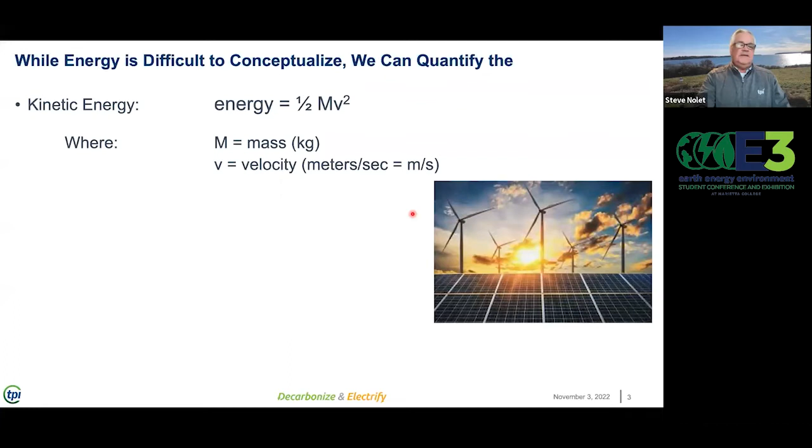We talk about kinetic energy, and kinetic energy is important to us in the wind industry because that is what we're converting to different forms of power or energy. We all know the equation for kinetic energy, right? 1/2 mv squared, where m is the mass of an object in motion, v is its velocity, and the resulting units, kilogram meters squared per second squared, are joules, right?

We all know this. We also know that potential energy, in the same units, is the mass times its gravitational attraction and its distance of potential travel, mgh. Other units that we might talk about besides joules: calories, British thermal units, ergs, foot-pounds, newton meters, and even that thing we see on our power energy bill monthly, the watt hour, is a description of the energy, the quantity of energy that is consumed or used or transferred.

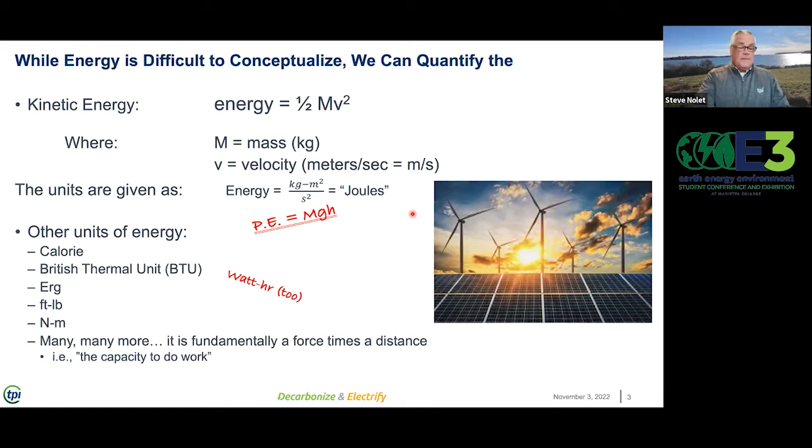There are many other ways to describe energy, but at the end of the day, it's the capacity to do work, and we use and harness energy to do work. Remember, energy and power are closely related, but not the same thing. Energy is the ability to cause change, but power is the rate at which energy is transferred.

Power is the change in energy of a system divided by the time that change occurs, and we call a joule per second a watt. Take 1,000 watts and we call it a kilowatt. Multiplying the power over a period of time gives the energy being used. There are 3.6 million joules in a kilowatt hour of energy.

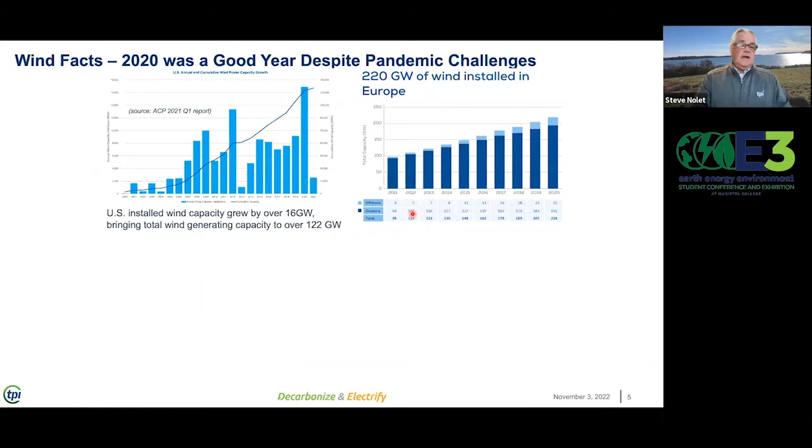Let's shift gears and talk more about wind now. It turns out 2020, despite the pandemic, was a pretty good year for wind energy, particularly in the US, where 16 gigawatts of increased capacity was added to our electrical grid. Similar performance occurred in Europe, where installed capacity across Europe reached 220 gigawatts.

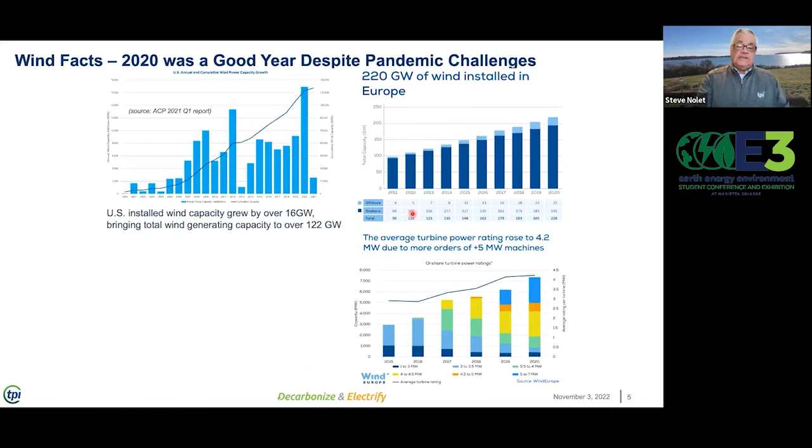Much of this is due to changing and growing technology, where the average power rating of machines tendered in 2020 rose to 4.2 megawatts per turbine, as turbine technologies now exceed 5 megawatts per turbine. These are very large machines.

Also at the end of 2020, during 2021, the Biden administration announced an ambitious but achievable goal in North America of installing 30 gigawatts of offshore wind by 2030.

The Europeans have been working on and installing large capacity offshore wind in the North Sea for about a decade now, and we have a long way to catch up in North America, but that growth is already beginning. Dominion Energy commissioned a 12 megawatt project in 2021, and New York State has committed large resources to building both infrastructure and capacity, with leases issued in the Long Island Sound. Offshore wind is coming to North America very quickly.

The nation's energy capacity, the United States energy electrical generation capacity, grew a lot, as I said, by 16 gigawatts in 2020. Now in the fall of 2022, we have an installed capacity of 140 gigawatts.

But there are technical challenges that remain. As you can see, a large sector of the country, particularly the Southeast, has very low, next to zero installed capacity. And that's not a political statement—that's a fact of reality of the lack of resource at ground level to generate power from the wind.

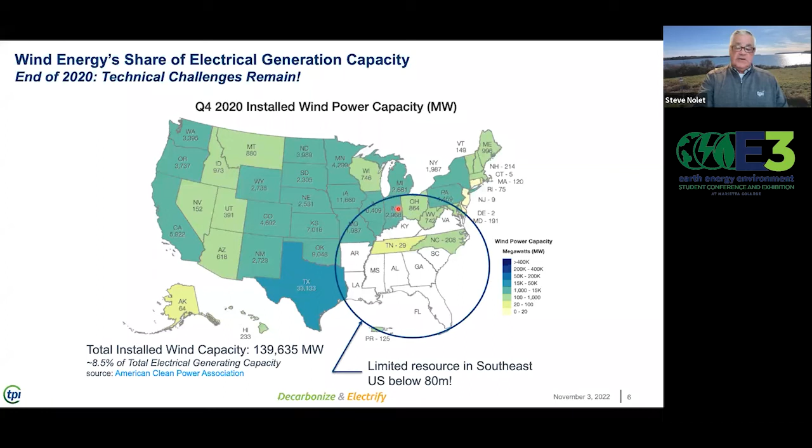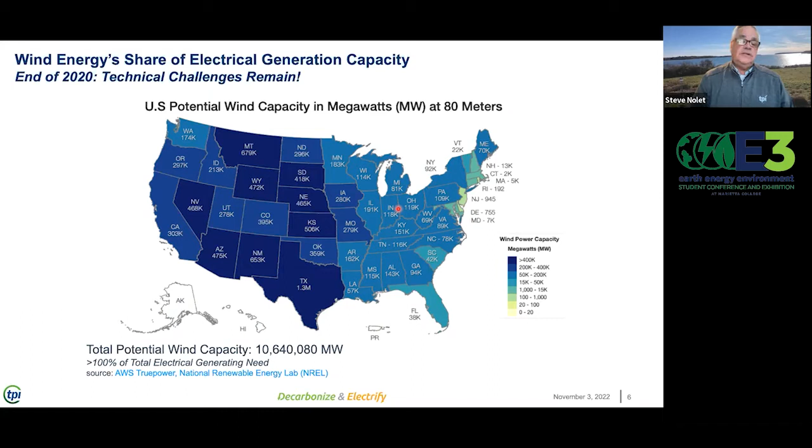With taller towers and larger capacity factors, it turns out that above 80 meters, we can build out capacity in the Southeast and across the country with a potential capacity of up to 10 terawatts of electrical energy generating capacity. The challenge is a technical one, and we can meet that challenge with new ideas and approaches to building our wind turbines and generators, particularly as the electrification of our economy continues to build out in transportation and other sectors.

Fundamentally, there are two types of wind turbines that we build and deploy. The most common, which you'd be familiar with, is the horizontal axis wind turbine. The name is self-evident—the axis of rotation is horizontal to the ground. We call these HAWTs, horizontal axis wind turbines, and they come in all kinds of flavors, but you're certainly most familiar with the three-bladed upwind HAWT that builds out our utility scale generating capability.

But there have been other technologies developed and demonstrated, including ducted turbines, to increase the swept area, the effective swept area of the wind turbine, and capture more energy.

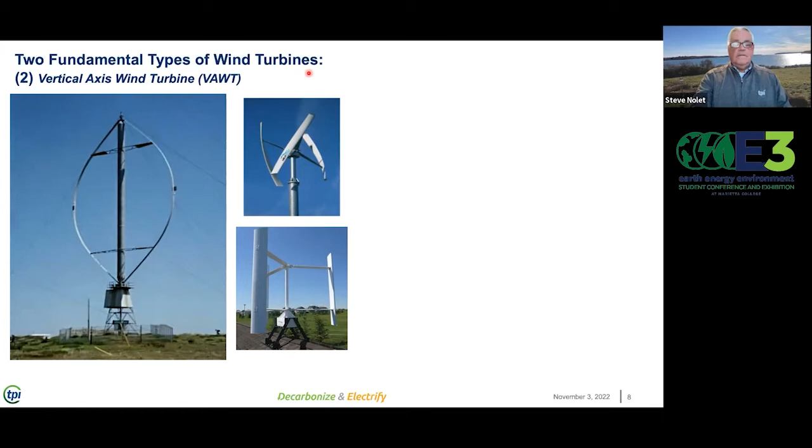Less familiar, but you probably recognize, are the vertical axis wind turbines, such as this Darrieus generator that was built in the 1970s, to more architecturally aesthetic Darrieus vertical axis wind turbine generators. Offshore systems that have been conceptualized, designed, and still remain on the drawing board are possible as well.

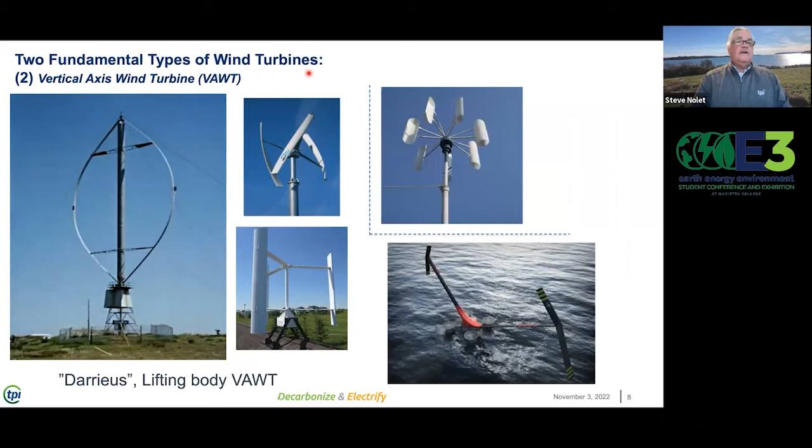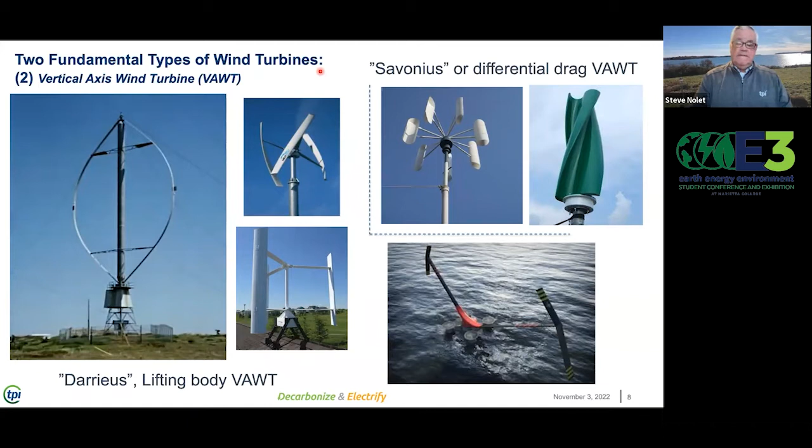There are other types of vertical axis generators called Savonius machines that use drag to drive or create torque that will turn a generator and create electrical power. But the jury's in: the horizontal axis wind turbine is the de facto winner of the utility scale wind turbine race.

A HAWT needs a way to keep the rotor facing into the wind in order to create lift on the blades, and that lift is then turned into torque, which turns a drive shaft, which turns a low-speed shaft that then rotates a gearbox to turn a high-speed shaft and run a generator. On large turbines, a yaw drive motor is used, so we have a control system that is driving the nacelle and pointing it ever into the face of the wind.

With the VAWTs, they're much simpler. The VAWTs operate without yaw bearings and are always pointed into the wind regardless of the wind direction.

Both the HAWTs and the VAWTs create torque to turn a generator through airflow over wing-shaped blades, specifically the Darrieus VAWTs, not the Savonius, which are drag machines. Horizontal axis blades generate lift throughout their full 360 degrees of rotation. With vertical axis machines, they lose lift as they turn away from the wind and actually create drag on the system. That drag is designed to be quite low, but they simply do not generate power through interaction with the wind through the full 360 degrees of rotation.

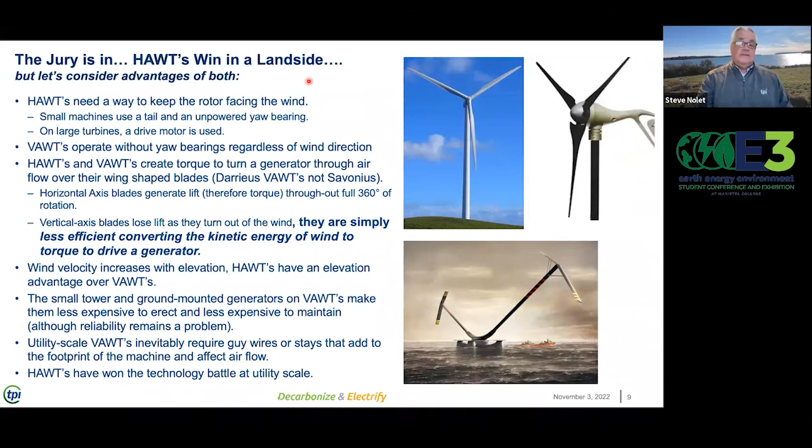Utility scale VAWTs, when we say utility scale we're talking very large systems, inevitably require some form of guy wire at the top of the tower to stabilize it and overcome some of that moment. It adds to the footprint of the machine and affects the airflow. It turns out that HAWTs have really won the technology battle at the utility scale, and we'll see why as we talk about cost of energy in just a bit.

We look under the hood of a horizontal axis wind turbine. They're really sophisticated and glorious machines, sort of a mechanical engineer's dream, if you want to know the truth.

Of course, we understand the blades, and I'll talk more about blades in a bit, but those blades are connected to a hub, and the hub is connected to a low-speed input shaft that is generally part of the system, where a gearbox then increases the speed of the rotation to a high-speed shaft through gearing.

Through that high-speed shaft, we turn a doubly fed induction generator that creates the electrical power that is fed to the grid, with unique and wonderful power electronics that keep that signal synchronous with our electrical grid to feed that power seamlessly to users and consumers.

There's always a meteorological tower on the turbine to provide control inputs, direction and wind speed, which will then send commands to pitch motors that turn a pitch bearing to rotate the blades, either increasing lift through increasing angle of attack, or feathering the blades away from the wind when it's overpowering the turbine, much like a sailor would let out the sheet or pull in the sheet to change his angle of attack on the sail. We do the same thing with the wind turbine as well.

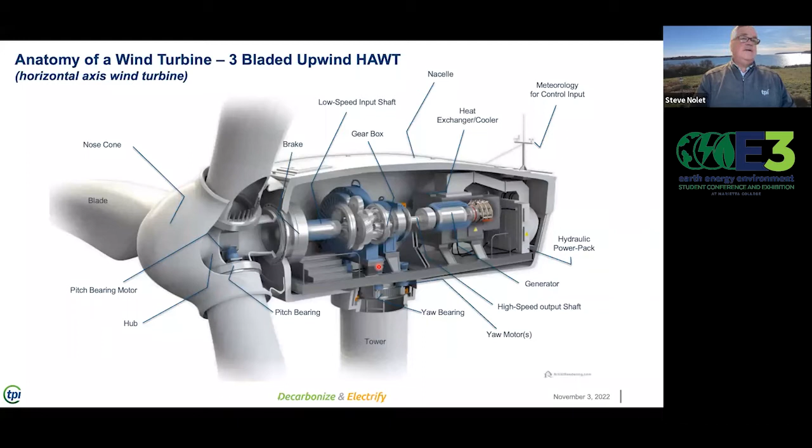There are larger machines today that are using direct drive systems, where the shaft from the rotor is directly fed to the generator. This requires very large rare earth magnets on very large running generators to create the velocity needed to create synchronous electrical power for the grid.

All right, let's talk a little bit about the energy that is in the wind. If we're going to create electrical power, we have to convert that kinetic energy in the wind to torque, and from torque we can turn a shaft and we can turn a generator.

What is the power in the wind? We talked about kinetic energy, and the reason I talked about kinetic energy is because that is what we're harvesting, that kinetic energy in the wind. We can describe that as 1/2 rho pi r squared v cubed.

That doesn't quite look like 1/2 mv squared, does it? Well, that's because we're taking into consideration the density of the air, the constant pi multiplied by r, which is effectively the length of the blade. So pi r squared is the swept area, with the density of the air as rho, and the velocity of the wind that passes across the rotor.

Pi r squared rho v is the mass that passes across the rotor and interacts with the blades. So this reduces to our kinetic energy equation, where the swept area is pi r squared, of course.

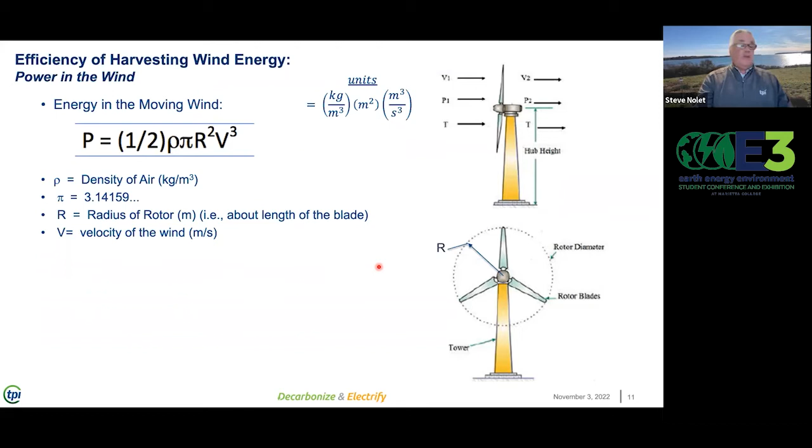If we look at the units, we have kilograms per cubic meter, the mass of the air, meters squared, the area, and meters cubed per second cubed as the wind velocity term, giving us the mass of air passing through per second. That gives us our units of watts, power generated. So that's the power in the wind, 1/2 rho pi r squared v cubed, joules per second.

So our kinetic energy, multiplied or integrated with time, is our energy, and our power is in joules per second, or watts.

So if we look at this equation, the power scales linearly with the air density. In the summer, where the air is a little less dense and warmer, we produce less power. In the winter, when the air is denser, we can produce a bit more power. This is only a couple of percentage points difference in air density, but that's not where we create our power.

The power goes up with the square of the blade length. So if we double the length of the blade, we have four times more power output, given all else being the same. But much more important, of course, is the power in the wind.

It's increasing with the cube of the velocity of the wind. So at very low wind speed, not much power, but we go up with the cube — we increase our power output with the cube of the wind velocity. That's rather compelling and will drive our choices for siting a wind turbine.

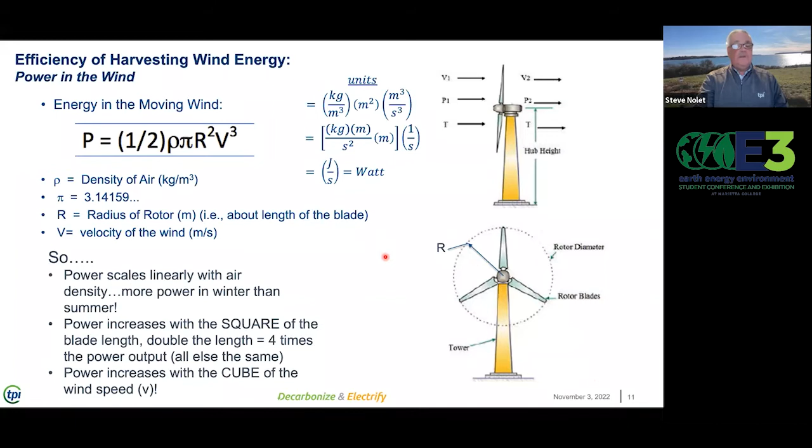What about efficiency? How do we describe the efficiency of a wind turbine? Do we convert all of the energy, all of that kinetic energy in the wind, to electric power? The answer, of course, is no.

In order to harvest 100% of the kinetic energy of the wind, we'd have to convert all of the movement of the air molecules to torque to drive the shaft and create electric power. That means that after the air passes through the turbine rotor, it comes to a stop — in other words, the velocity is equal to 0 meters per second.

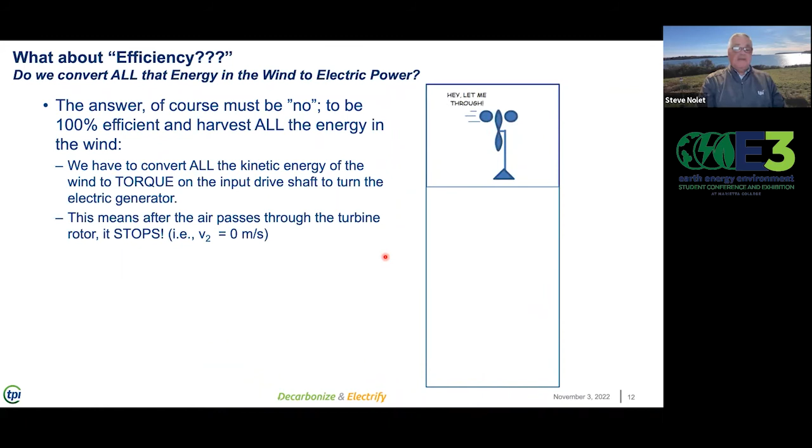Now picture our cartoon wind turbine. We've got air molecules wanting to rush through. That can't possibly happen — we can't stop the wind behind it because we'll create a traffic jam. And if the air doesn't move behind the turbine, that means it comes to a stop and no more air can flow through our turbine.

So it's simply not possible to convert all of the kinetic energy to electrical power. But what's that limit? We call that limit the maximum amount conceptually possible to convert — the Betz limit, from Albert Betz in 1919. So we've known about this for a long time.

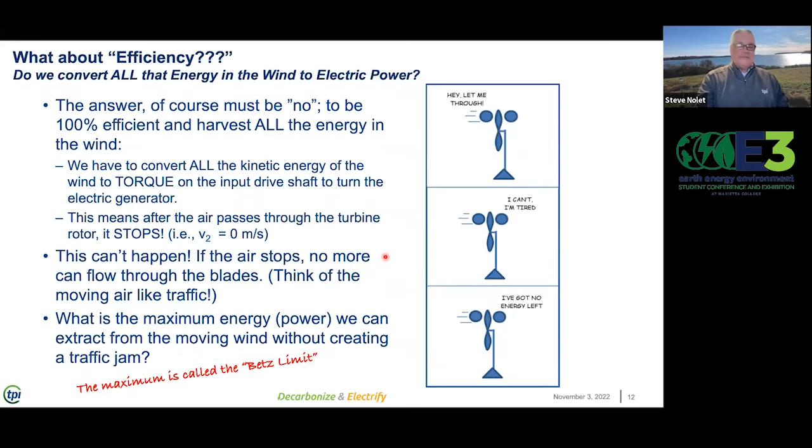We solved the problem in a longer course — I could teach and derive the Betz limit, it's quite straightforward. But what is that Betz limit? We'll talk about it in just a minute. Before we do that, let's talk a little bit about energy production terms when it comes to wind energy.

The power in the wind, as we said, is 1/2 rho pi r squared v cubed. And we talk about something we call the rotor power coefficient. The rotor power coefficient describes how effectively we interact with the wind and harvest that percentage of available power.

We'll look at an example of that right now. The CP is defined as the fraction of power in the wind that's converted to mechanical energy. In other words, P equals CP times 1/2 rho pi r squared v cubed — simply a coefficient describing what percentage of the power in the wind we convert to electrical energy.

The Betz limit says that the maximum coefficient of power that is theoretically possible is 59.3%. I get calls almost on a monthly basis from people across the globe that have a better wind machine, and the first thing we'll look at to determine whether or not they're selling me a perpetual energy machine is their CP.

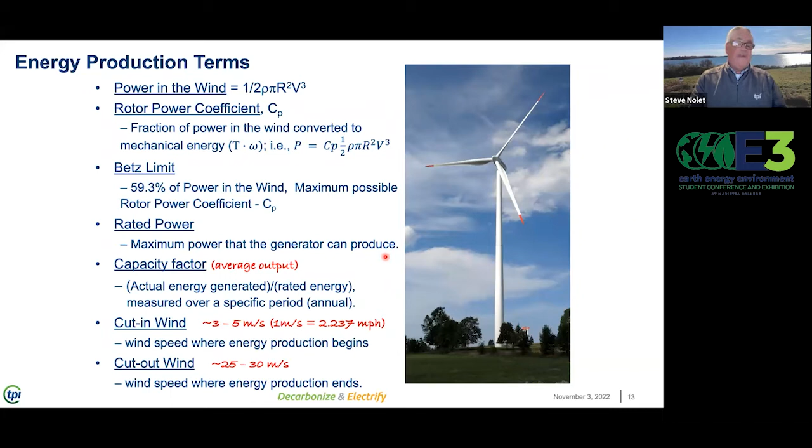You might ask, Steve, why don't we keep the generator running? We'll talk about that in a moment, but you can imagine at some point a turbine can become overpowered, and when it becomes overpowered and the blades deflect far enough and strike the tower, that's a bad day in the life of a wind turbine.

Let's talk a little bit about turbine efficiency and the power coefficient CP. We define the CP as the energy produced by the wind turbine divided by the total energy available in the wind at any given wind speed. We can write that as output equals CP times one half rho times the swept area of the blade times V cubed.

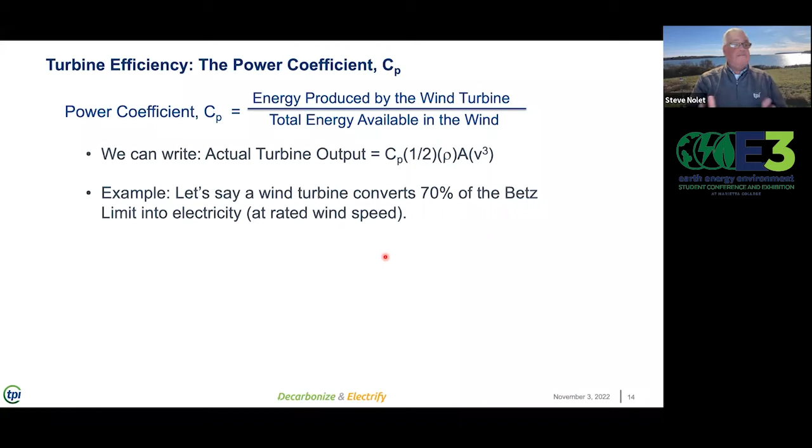If we say, for example, that a wind turbine converts 70% of the Betz limit into electricity at a rated wind speed, then the CP is 70% of 0.593, which equals about 0.4—so the wind turbine converts about 41% of available wind energy into electricity. That's pretty good value. Typical power CPs of modern turbines today run in about the 35 to 45% range—35% to 45% of that kinetic energy directly converted to electrical power supplied to the grid.

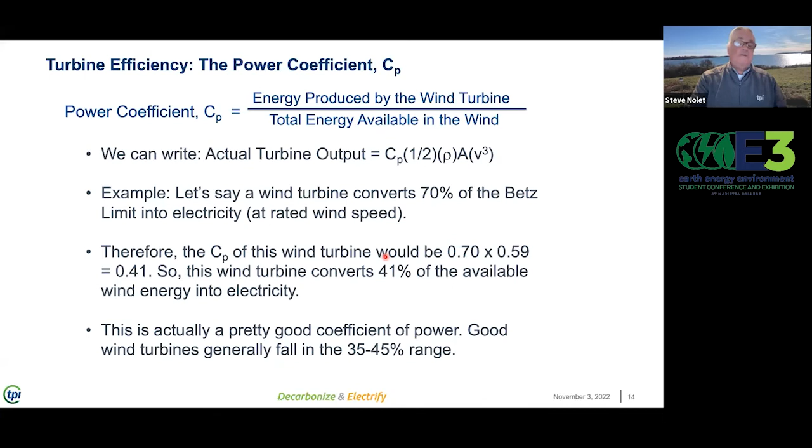Let's look at this in more detail. Let's think about a 48.7 meter wind turbine blade. When I wrote this slide up a couple of years back, that was a nominal size of a wind turbine, a 2.5 megawatt or maybe a 1.7 megawatt machine with a rotor CP of 39%.

If we look at the power output in the wind, or the power output of a turbine, on the y-axis versus the wind speed in meters per second, the blue line represents the total power in the wind—that's our power-in-the-wind equation plotted in kilowatts as a function of wind speed. The Betz limit, which defines the maximum available for us to turn into electrical energy, is the red line, and then multiplied by our rotor CP of 39% is the green line.

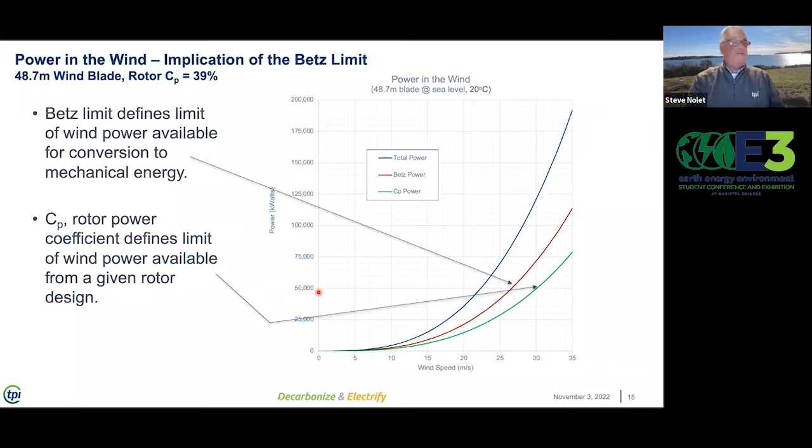That tells us that at 30 meters per second, our turbine is capable of producing 50 megawatts of power. That's a lot of power, and yet I'm telling you that this turbine is rated at about 1.7 to 2.5 megawatts. Why is that? Well, we'll look at that in just a minute.

Let's look at it a little bit more closely.

Let's look at the capacity factor. Capacity factor is the fraction of time, usually over an annual period, that a turbine is operating at its rated peak power. The capacity factor is the average output divided by its peak output.

Capacity factors are typically 30 to 50%. In fact, modern wind turbines today that we're putting in the field all have capacity factors on the order of 50%.

The capacity factor is a characteristic of both the turbine, what we rate the power at, and the CP, the power coefficient, but it's also a function of the site characteristic. How much wind is blowing? How often is the wind blowing? How much continuously? Do you have long periods of low wind speed where you're not producing much power? So the capacity factor is a combination of turbine technology and siting, meteorology, where we put a turbine.

In theory, the capacity factor can be 100%. We could, if sited on top of a mountain, on top of Mount Everest possibly, or some location that's ideal, operate the turbine continuously at its rated power.

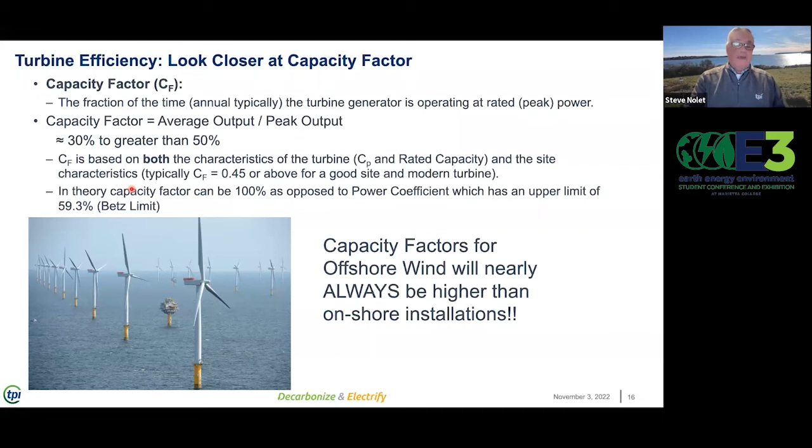Maybe offshore. Capacity factors offshore will always be higher than onshore installations for a number of reasons. But for one, I think, as we all know, offshore the wind is blowing more continuously. Turbulence factors are lower. Wind shear is less of a factor because it's flat and continuous. So our capacity factors, our performance of the wind turbines, are better offshore.

Now let's get to the point about capacity factor, rated turbines, and look at the power curve of a modern wind turbine today. Here's our plots again: power in the wind, blue line; Betz limit, red line; the CP power of the turbine, the green line. And let's talk about a 1.7 megawatt rated machine, for instance.

What's that mean if a turbine is rated at 1.7 megawatts of power output? That means its low speed shaft, its gearbox, the generator, all of the power electronics, the wires themselves, the physical cables that carry current, the tower, the foundation, the grid connection—everything that makes up that turbine—are all sized to handle no more than 1.7 megawatts of power.

Why wouldn't we increase that? Well, it would cost a lot. It would cost more money to increase it for that turbine.

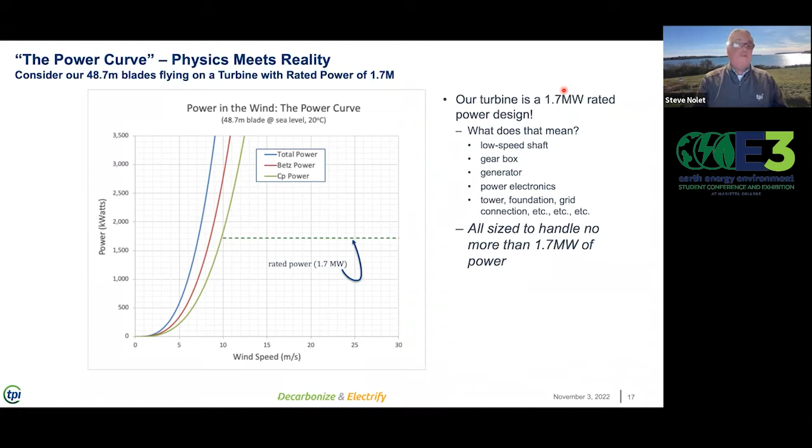And so we build what we call the power curve, which describes the power that turbines output as a function of the wind speed in terms of its rated power. Again, let's look at the x-axis, particularly from 0 to about 3 meters per second—we don't even create any power at all. That's lower than the cut-in wind speed.

And then we have the cut-out wind speed at about 25 to 30 meters per second, where the wind is so strong that we can't feather the blades and we can't generate more power. We risk damaging the components of the wind turbine, so we cut out and stop producing power. Remember, that's a hurricane, right? We don't live in places where hurricanes are blowing continuously.

In fact, the turbine spends most of its time working in region 2 of the power curve, somewhere between maximum rated power and the cut-in wind speed. And in this region is where we're applying technology to maximize the output of the turbine.

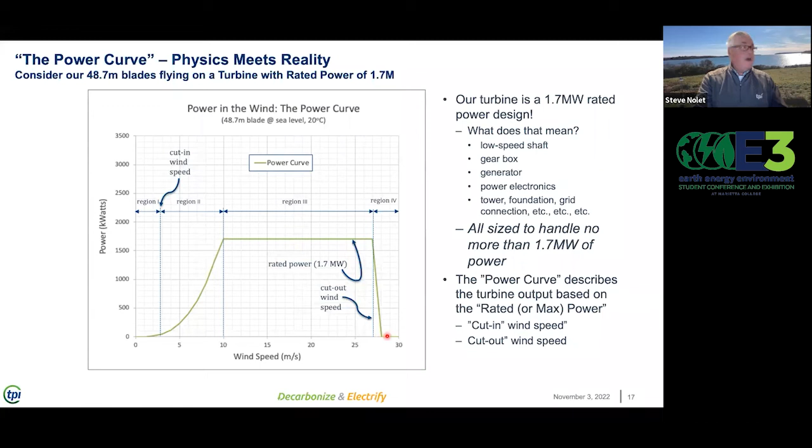Once we hit, say, 10 to 12 meters per second, the rated wind speed of the tower where it produces the rated power, then above that wind speed we begin to feather the blades to prevent overloading the turbine. And these are very windy days. Anything above 15 meters, that's 35, 40 miles per hour. We don't live in places on the planet where the wind blows like that continuously, but there are times where the wind is blowing at that power. We want to generate power, and we feather the blades to reduce the load on the blades, load on the machine, load on the tower, and all of the components to prevent damage. And we have what we call the power curve of the wind turbine.

Let's talk about the wind resource itself. The wind speed at any given location is continuously varying. This variance can be observed in changes in the annual or seasonal or with weather systems, or on a daily basis at different times of the day, and from second to second, which we call turbulence.

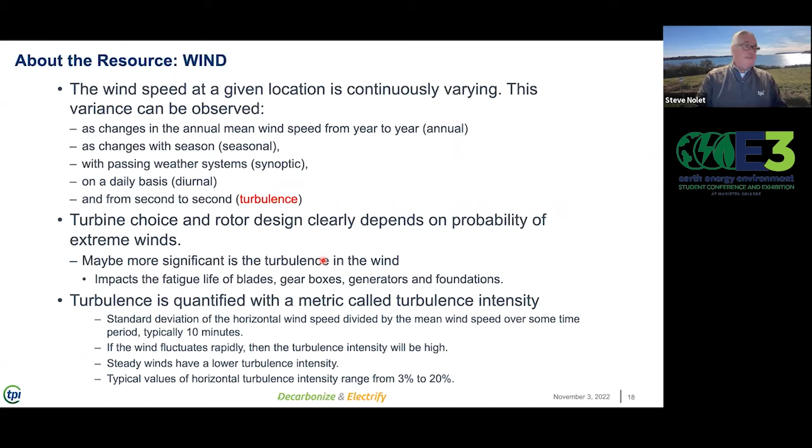The turbine choice and the rotor design depends on the probability of extreme winds. There may be more significant turbulence as a result, and that impacts the fatigue life. Turbulence and high extreme winds affect the fatigue life of the blades, the gearbox, the generator, and our foundations. Turbulence is quantified with a metric that we call the turbulence intensity.

That's the statistical variation of the horizontal wind speed as a function of time. We measure that over some period of time, average it, and create the turbulence intensity factor, which impacts how we design that blade, what rotor we size it with, and how robust the mechanics of the system must become.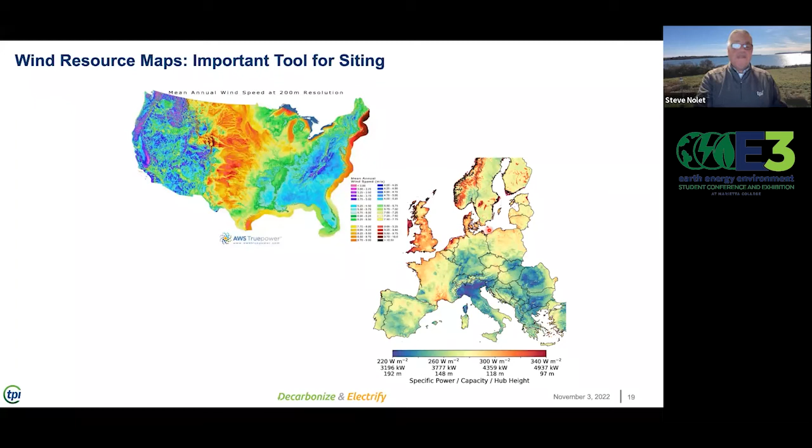In Europe, which has a large amount of wind power, it's dominated along the southern part of France, eastern Spain, northern Germany, and the Baltic coast, and in the North Sea off of Great Britain. Tremendous wind resources in Denmark and the Scandinavian countries as well.

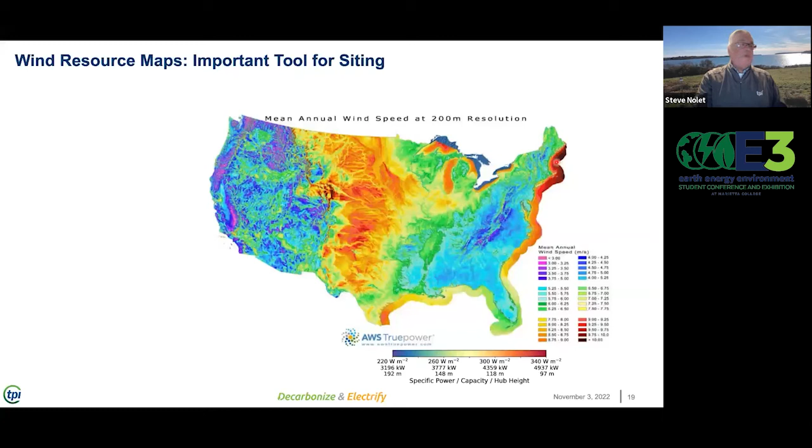We use those wind resource maps to help us start the evaluation of location of wind. Notice off the coastal United States on the East Coast, tremendous wind resources there as well. We could say the same about the North Sea and in between Great Britain and Ireland, tremendous resources of offshore wind as well.

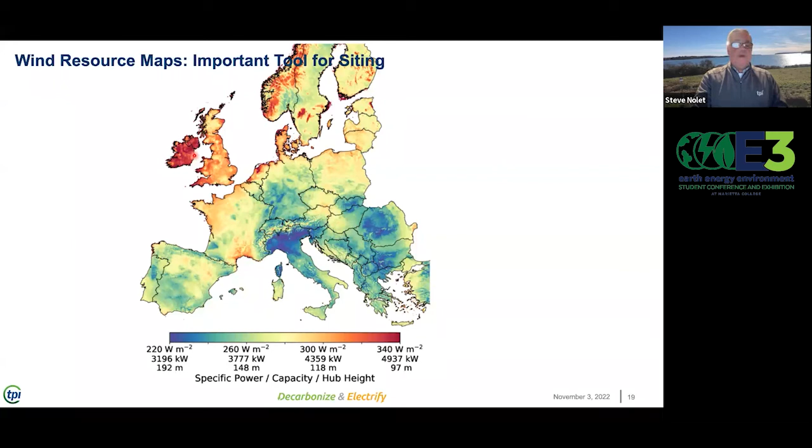To help organize this, the International Electrotechnical Commission established a set of wind classes. The lower the wind class, the higher the average wind speed. So we have class 1, class 2, class 3, and class 4. Depending on the wind class, we can talk about the nominal power density in the wind, from 600 watts per square meter down to a measly 130 watts per square meter in class 4 wind sites.

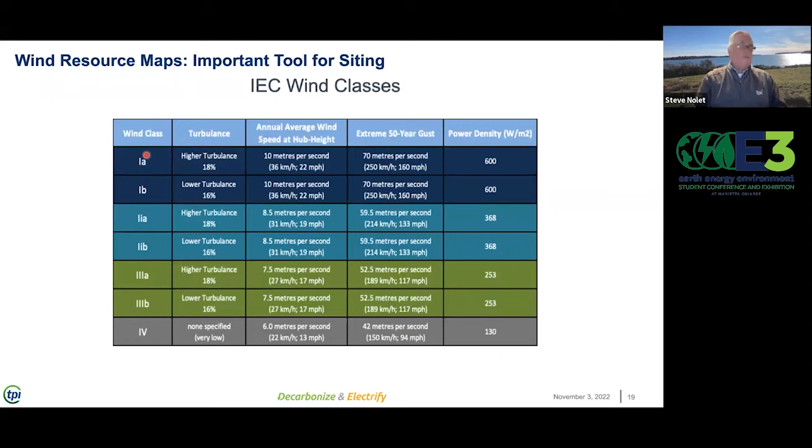We are beginning to develop class 4 wind sites as the number of more resource-rich sites have been developed, and that requires technology and technical development that I'll talk about in just a moment.

When we think about that wind resource, it's seldom uniform. We worry about wind turbulence and wind shear—it's different at ground level than at the tip of the blade at the top of its rotation. We have influence from upwind turbines. Most turbines are located as part of a wind plant or wind farm, and upwind turbines can influence downstream turbines based upon their siting and the direction of the wind. Terrain features and structures will impact the incoming resource, all of which will affect the dynamics of the wind turbine.

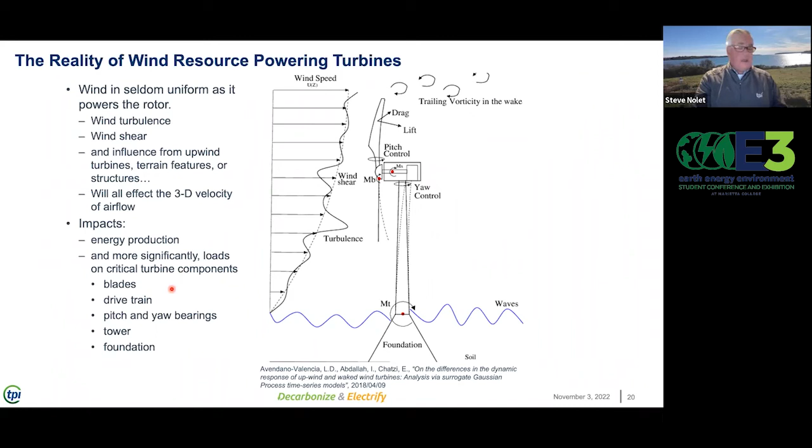It impacts our energy production. It impacts the life of the blades, the life of the drivetrain, and the O&M costs, the operational and maintenance costs also. Now let's go offshore and think about floating machines, the dynamics of the movement of that foundation with relationship to all of the other components. A tremendous dynamic problem to solve, with challenges of structural engineering, ocean engineering, and tethering. The offshore oil and gas industry has been a tremendous boon to offshore wind in developing an infrastructure and the capability to erect and station these massive structures.

We've talked about wind turbine efficiency a lot, but the real question is, what does that mean? It's kind of like saying the wind is free—it blows constantly around the globe. If the input isn't completely utilized, it's not like we've lost anything other than opportunity potentially. But let's face it, the overwhelming volume of wind kinetic energy goes untapped. We don't see any mortal consequences.

I think the real metric to discuss when we talk about wind energy, or almost any energy system, is the cost required to produce that energy. The logical metric to discuss is the cost of energy produced by a wind turbine compared to maybe other sources of energy, such as a diesel generator.

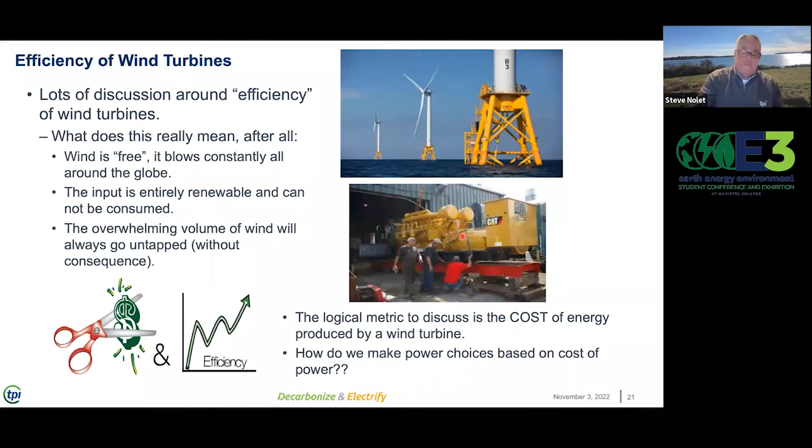Well, we introduced something we call the levelized cost of energy as a useful metric, and we could have lots of discussion about this, particularly as it relates to renewable energy versus carbon sources versus solar versus others. And we want to have that discussion.

Levelized cost of energy allocates the cost of energy of any given system across its useful life to give an effective price per each unit of energy that energy system generates. It's like averaging all the upfront costs across production over a long period of time. Levelized cost of energy is a single metric that allows us to compare different types of energy systems.

Renewable projects generally have very high upfront capital costs, and the fuel cost is near zero. Whereas a natural gas plant, where the capital cost is much lower, the fuel costs are much higher. How do we compare those systems? Well, levelized cost of energy allows us to do that.

It can actually be used to compare the price you'll pay on your utility bill when we talk about dollars per kilowatt hour. The calculation of LCOE, and I can hear a lot of people already probably exclaiming, is an extremely complex calculation. It can incorporate costs and offsets and credits available from a variety of different financial instruments, and that can even vary from region to region, making that comparison challenging based on local regulation and local availability of offsets.

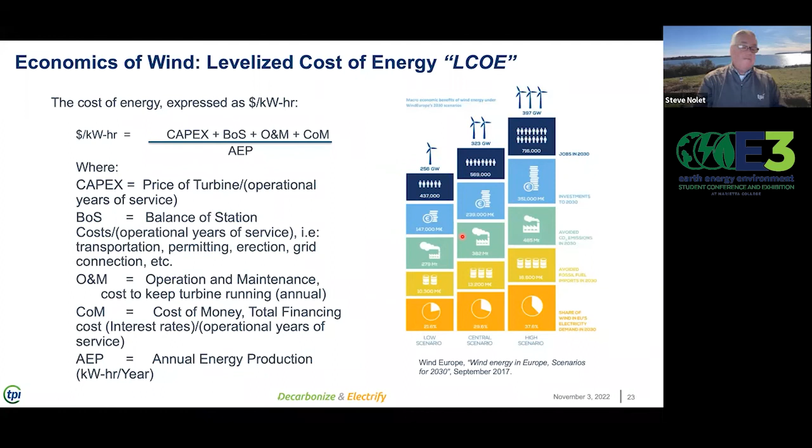But I want to talk about offshore wind. Offshore wind is probably a significant component of the future for wind energy around the globe. We see these installations becoming larger and larger, with 13, 15, and even now 16 megawatt machines with over 240 meter diameter rotors being erected in offshore environments.

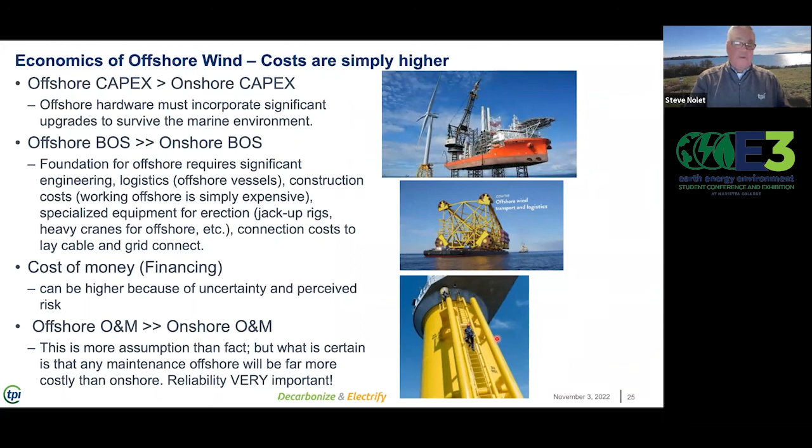And the O&M costs for maintenance offshore require specialized training, specialized deployment vessels, and a huge effort to repair and bring an offline turbine back online. So reliability is super important in the offshore environment, because the offshore costs can be so much higher.

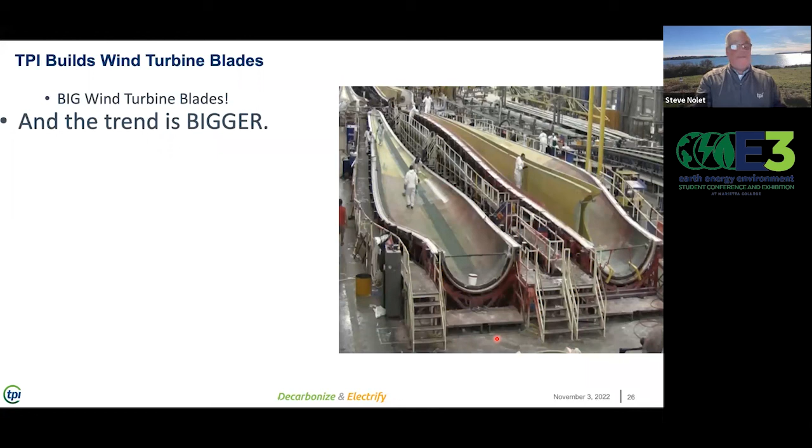Well, my company builds wind turbine blades. That's what we do. This is a measly 48.7 meter long wind turbine blade in construction in our factory in Newton, Iowa. But the trend, they're getting bigger. Every single product cycle, we're seeing 5, 10, 15% larger increases in the length of these blades. And that goal is to reduce the levelized cost of energy.

We know that energy production is increased with swept area, R squared. As a manufacturer, we're seeing blade designs that are continuously being extended for a given fixed asset. Turbines that were rated at 1.5 megawatts swinging a 34-meter blade 15 years ago, that same fundamental turbine is swinging 60-meter long blades today and have been uprated to 2.5 or even 3 megawatts.

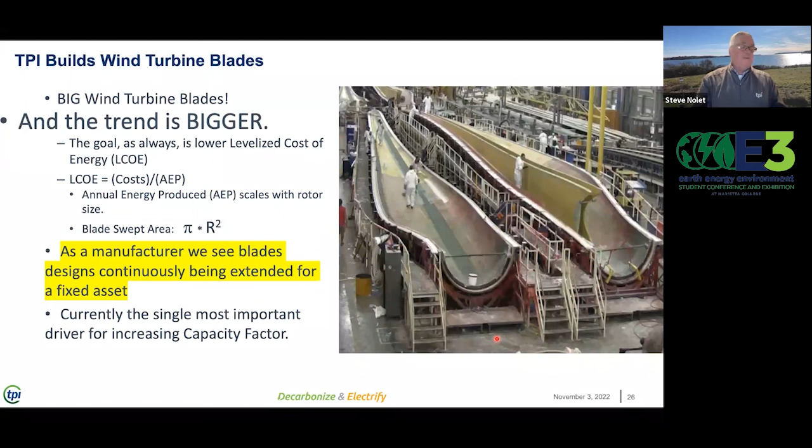Currently, the single most important driver is increasing that capacity factor, the amount of energy relative to its rated power that it's generating on an annual basis.

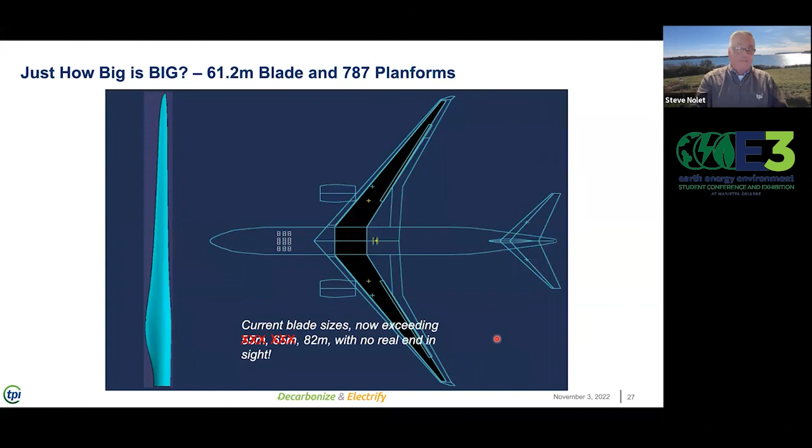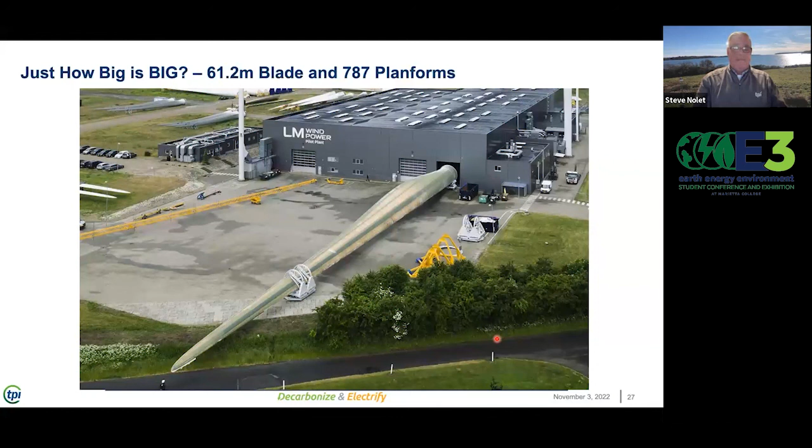And there are really no end in sight. Recently, GE and their subsidiary LM Wind Power produced the 107 meter long blade for the Haliade offshore wind platform. That was quickly trumped by Siemens Gamesa that put out a 114 or 117 meter long blade, and the length wars are going on. When it comes to wind power, size does matter.

All right, let's wrap this thing up. Energy is likely to be the single most important component of modern day life, probably after running water anyway. I think all of you are here because of that, and I commend your choice of career. Wind generated power is competitive, it's sustainable, and the installed capacity is constantly expanding. It's an important part of a broad energy generating portfolio that is going to necessarily include solar power and gas power and nuclear power, and hopefully one day fusion power. And I hope that one of you on this meeting today takes part in that kind of discovery.

Annual energy produced is a strong function of the resource availability in wind, and its trend to taller towers to increase availability is a constant trend. The economics of wind energy demand higher capacity factors, and that's trending towards larger rotor diameters and longer blades.

Offshore wind will provide an ideal opportunity for acceptable siting, both from a social perspective as well as a technical perspective. You can expect that to continue to occur. But costs are much higher, so we have a technological challenge to bring those costs down and create economically sustainable systems as well. Capital equipment, balance of system costs, O&M costs are all higher, but the opportunities for increasing the annual energy production makes that potential so important for the future of our electrical generation to power the world.